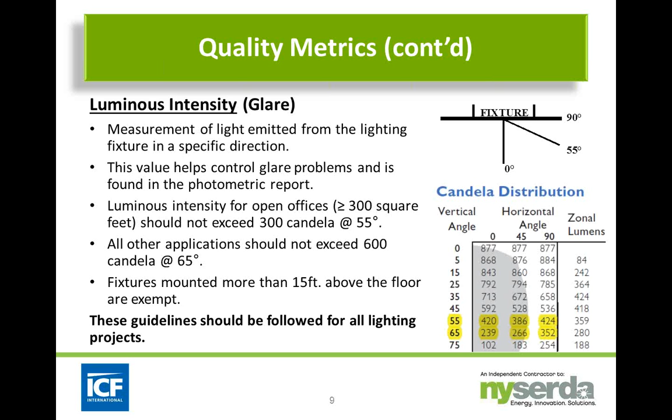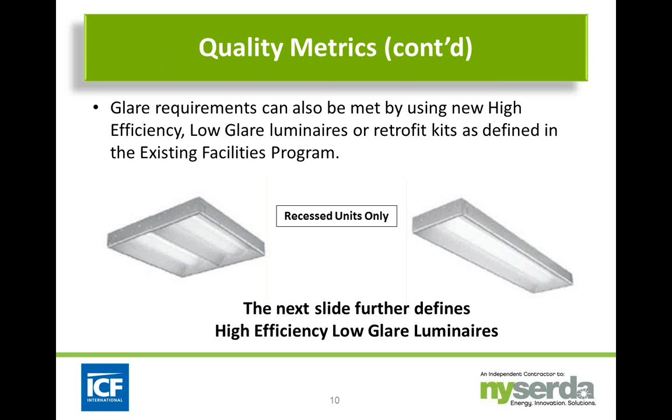Continuing with glare control, there's another option: you can use what we call a high-efficiency, low-glare luminaire or a retrofit kit, as defined in the existing facilities program. Some of you might recognize this type of luminaire—it's been around. We're now starting to see more solid-state lighting or LED luminaires with these characteristics, and we're trying to evaluate them now.

To qualify as a high-efficiency, low-glare luminaire, the overall fixture efficiency must exceed 80%, and it must distribute light at very high angles. At least 15% of the light output, or zonal lumens, must be between 60 and 90 degrees. 0 degrees is looking straight down through the luminaire, and 90 degrees is looking straight out parallel to the floor from the luminaire.

1 unit equals 1 fixture with 1 or 2 lamps. This is one of the qualifications for a high-efficiency, low-glare luminaire with a single ballast.

It must also incorporate advanced lighting distribution and glare control. This is not a common basket fixture you might be familiar with, which used to have perforated louvers or perforated reflectors with a mylar backing. The efficiencies on those old basket fixtures were actually quite poor—somewhere in the 50s and 60s percent was the amount of light getting out of the fixture. So high-efficiency, low-glare luminaires are much more efficient and do a much better job.

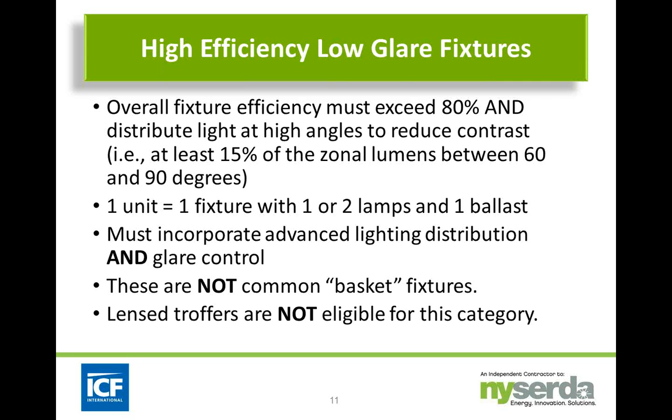This is also not your typical lens troffer. You don't want to use an A12 prismatic lens luminaire for this type of application.

The next quality metric is horizontal mean illuminance—basically the light level, the foot candles, the average light level in the space. We're not asking for a maximum or minimum, just the average. We've taken the recommendations from the Illuminating Engineering Society handbook and incorporated them into the program.

You can find the information for different categories because not every space is the same. This is on the metrics by space page, which is included in the application packet. We're actually going to look at portions of the metrics by space page in a few minutes.

To get to the average horizontal mean illuminance, you need things like initial lamp lumens, fixture efficiency, and ballast factor, but those are not the complete story. You need to determine the light losses, the maintained lumens—that's what you're looking for in horizontal mean illuminance.

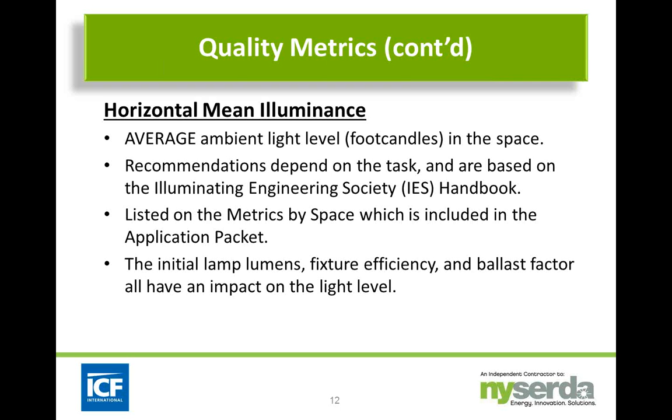Some minimum target light levels you might run into are, say, 10 foot-candles for a corridor or hospital. I won't go through every line, but one item we like to focus on is 50 foot-candles for a high school gym. Depending on the type of gymnasium, it may require a different light level, so you need to be aware of that issue.

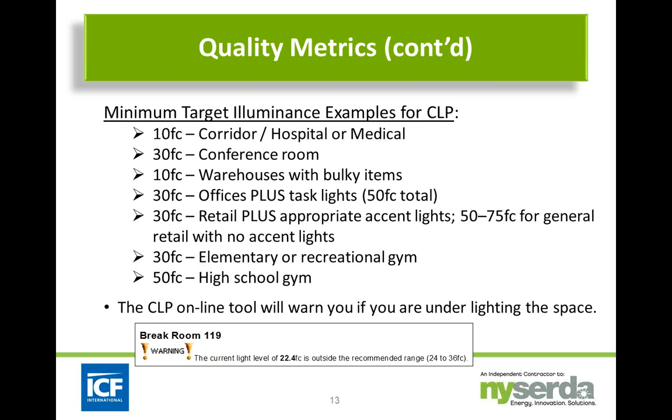When you enter things in the online application tool, you can use it as a design tool because it will give you back calculated light levels. If the light levels for a particular space are lower than they should be, you'll get a warning message, like here, saying the current light level is 22.4 foot-candles, outside the recommended range of 24 to 36 foot-candles.

Another quality metric is illuminance uniformity, basically the maximum to minimum light levels on the work plane. You want to minimize as much as possible the high and low spots in that space, so there aren't very dark areas in between the luminaires.

How do we do this? We look at the spacing criteria. The fixtures must be laid out within the spacing criteria listed on the manufacturer's luminaire photometric report or specification sheets. They're different if it's anything other than a round fixture—different along and across. Along is usually with the length of the lamps, and across cuts through the length of the lamps, so you have two different dimensions.

Even some newer round fixtures with LED sources have along and across spacing criteria that vary, so be careful of that. This spacing criteria for illuminance uniformity does not apply to accent fixtures—if you have a decorative fixture, a track head, or a wall wash fixture, it doesn't apply for this program.

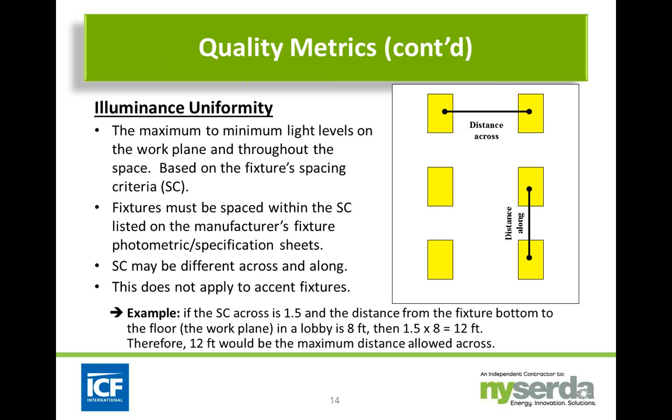Now, how does this work? If the spacing criteria is 1.5 across the luminaire, and the distance from the fixture bottom to the floor or work plane is 8 feet, then 1.5 times 8 feet is 12 feet. So the center of the first fixture to the center of the next fixture cannot exceed 12 feet across.

We also want you to consider vertical illuminance as part of the quality metrics. Horizontal illuminance, or illuminance uniformity, is based on the light output between the fixtures and the spacing criteria between the fixtures, but we want to be concerned about the fixture distance to the wall.

I've seen projects over the years where somebody said, okay, I've got a 30-foot wide room, and I'm going to put 2 rows of fixtures in there, coming in off the wall 10 feet to the first fixture, then 10 feet to the next fixture, then 10 feet to the wall. Sounds logical, you're splitting up that 30 feet 3 ways between all those fixtures. But in most cases, that actually does not provide you proper illumination at the walls.

You really can only use half the distance of the normal spacing between fixtures when you're spacing to the wall. So if you're allowed 12 feet between the fixtures, center to center, you're only allowed 6 feet to the wall. This will provide you relatively uniform vertical illuminance.

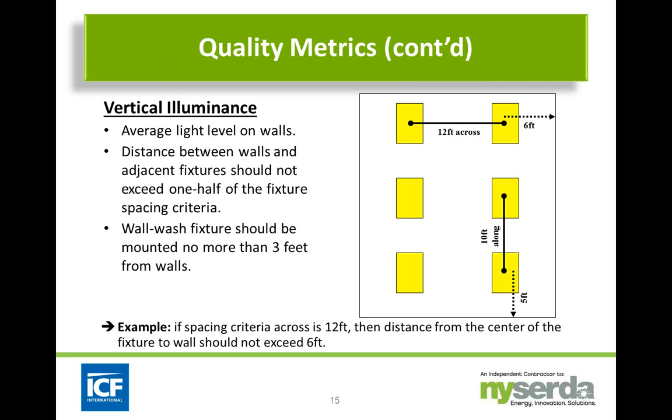We should let you know that we do provide a 20%, or 2-foot, allowance on that. We understand that the geometry of the rooms and the geometry of 2x4 ceilings or various different ceiling treatments may not allow you to work exactly within that spacing criteria, so we do allow about a 2-foot allowance.

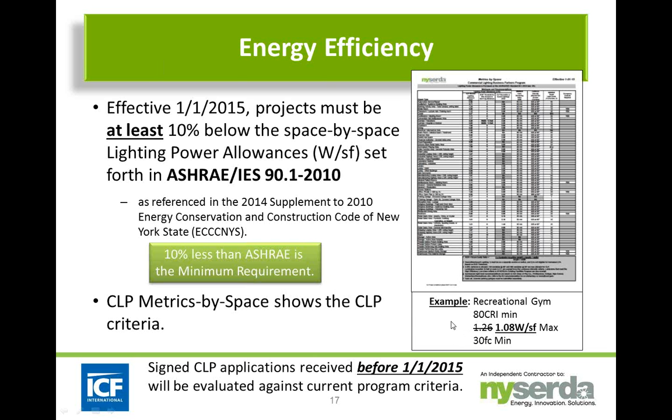As we mentioned, we're currently following, and will be following, ASHRAE 90.1 2010, at least 10% below that. But in addition to changing some of the watts per square foot numbers for energy use, it also made some different modifications, so you don't have to be quite as concerned about the numbers dropping too low.

There are considerations for spaces that have odd dimensions and a high room cavity ratio. We'll discuss exactly how you calculate room cavity ratio in a second, but essentially these are spaces with very long or very tall dimensions, and they get an additional 20% of lighting power allowance for a high RCR. Certain types of spaces will also allow for additional lighting power allowance for decorative or accent lighting.

This is a totally separate number from the main general lighting power allowance, and we'll get into some of those numbers in a minute. We have the metrics by space page, where you can look up the lighting power allowance for each space type, for general illumination, for accent lighting, and we'll also show you the RCR allowances based on high RCR numbers.

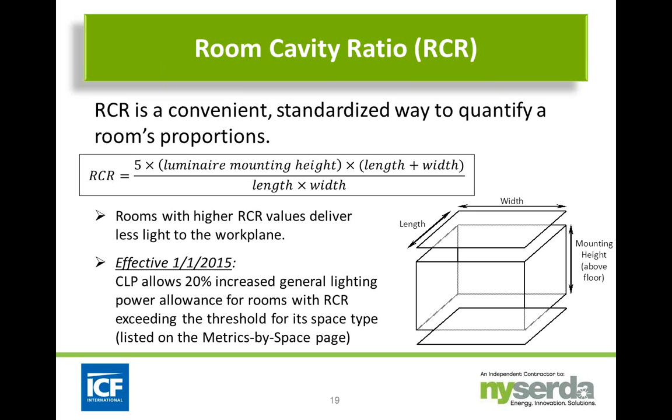And divide that all by the area of the room, or the length times the width. So if the room has a higher RCR than the limit we're working with from ASHRAE, then it's allowed an additional 20% for general illumination for that particular space.

For example, if you have a private office that's 12 foot 6 by 10 foot by 9 feet high, when you run through the calculation, it will have an RCR of 8.1. The room cavity ratio threshold for private offices under ASHRAE is 8. Since 8.1 exceeds 8, the standard lighting power allowance of 1 watt per square foot is increased by 20%.

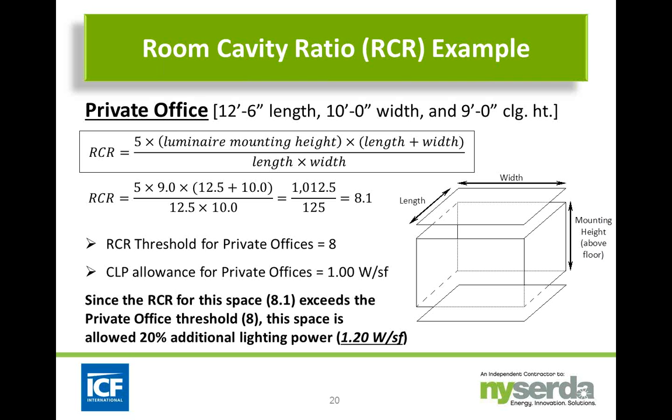You get an additional lighting power allowance of 20%. So instead of 1 watt per square foot for that private office, you have 1.2 watts per square foot. It's harder to light those high ratio spaces with the same lighting you would use for a standard type space. That's the reason for having the additional lighting power allowance.

How does this all come together? If you're dealing with different spaces and different sizes, and have watts per square foot allowances for the different categories, it all comes together by looking at the different categories and collectively adding them together.

So we're not only allowing an additional watts per square foot for high RCR spaces, but we're also allowing you to meet the watts per square foot for the entire project rather than just for a specific space.

So let's say your open office actually has 1,100 watts for some reason. As long as your total watts in the entire space or the entire project do not exceed 6,492 watts for this example, then you can still qualify for that project.

Restrooms are a tough one - a lot of times it's hard to meet the 0.88 watts per square foot required. So these are areas we can look at collectively, and you can aggregate the total watts for the entire project.

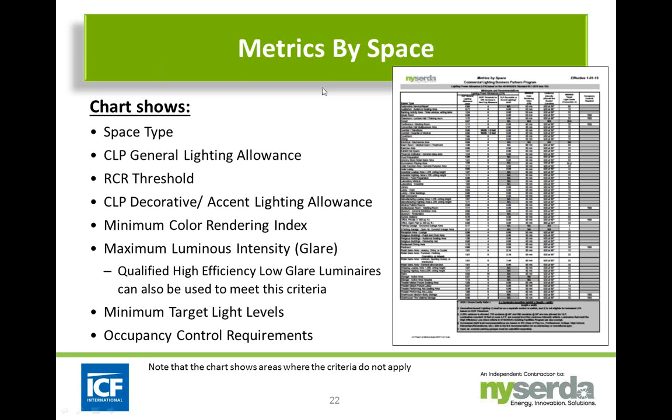And so the metrics by space page pulls all these details together. What the chart shows is the space type, the commercial lighting program general allowance, the RCR threshold, the decorative allowance, the color rendering index that's required, the light levels and glare control, and what occupancy sensors are required, or which types of spaces they're required for.

For auto repair service specifically, there isn't an additional allowance for accent or decorative lighting. But there are other spaces, like banking activity areas, where you have accent lighting allowance, decorative spaces, etc.

The bottom table here, which is on the metrics by space, also reminds you of some of these other rules, like the 20% variant that you get for the additional RCR, the gymnasium light level that you want to look at the IES requirements or recommendations for the different types of gymnasium spaces, whether it's an NCAA type of space, whether it's just a recreational gym at the YMCA or your local exercise facility, or whether it's a high school gym. They all have different lighting allowances or light level requirements.

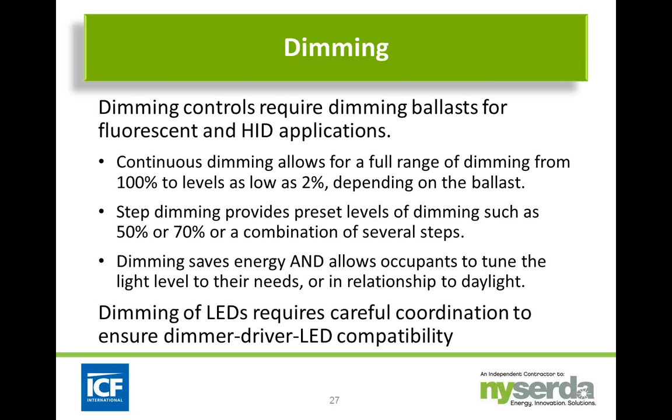We do actually have an advanced controls presentation that some of you may have attended in the past that gets into the deep details of daylighting and daylighting controls, and we can talk to you about those if you're interested.

So you might also, on controls, see complete energy management systems or subsystems for lighting. And they can actually integrate the time of day settings with the vacancy sensors and other features of the dimming systems. One example might be to have various different presets for cleaning crews. So if a cleaning crew is coming in at 8 o'clock at night and the office has basically been shut down since 6 o'clock, then the lights can be controlled for that short period of time while the cleaning crew is in the space.

Today, we're seeing a lot more with wireless technologies for controls so that you can actually, without having to rewire a luminaire, add a module and be able to control that from some kind of a wall switch that has a wireless receiver and transmitter. The initial cost might be a little bit higher, but the overall installation cost of adding wireless technology to a particular space may be much less expensive than trying to rewire. And now there's also self-commissioning units that allow you to do daylight sensing by just going in, setting it all up, and it will actually self-commission itself over time.

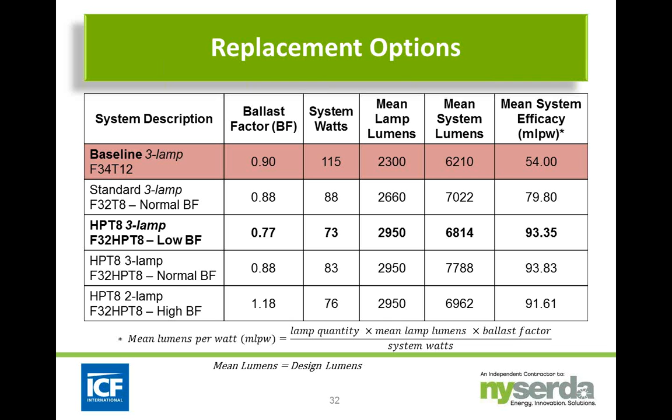You have different categories. You can change to a standard lamp with a normal ballast factor F32T8. You can go to a high-performance T8 low ballast factor, and that's the application that we're actually going to focus in on here, where you can go to a 3-lamp 0.77 ballast factor, which is a 73-watt system, and gives you about 6,800 lumens out of that entire system, which is considerably higher than the 6,200 lumens from the F34T12, and the lumens per watt of the high-performance T8 low ballast factor luminaire is about 93 lumens per watt. And this is a really good example of how you can make a change out this way.

So if you looked at an existing 3,000 square foot retail space and the owner was looking for a 75 foot-candle light level, they're probably only in the 60s currently. They wanted to know what their options were. So if the existing system's F34T12s, it's about 115 watts per luminaire, and they did have 60 foot-candles there.

Today, we believe that there's applications where we can go also to LED, but at this point, we're looking for the cost effectiveness of that particular application, and we're looking for information from people to help us. The cost of the fixtures at this point hasn't allowed it to get down into these kind of cost savings.

And so you can actually evaluate this information through a life cycle cost tool that we have available to our business partners, where you can input the kilowatt hour rate. You need to look at somebody's utility bill. Kilowatt hour rates vary. If you were in upstate New York last year, it went up to 20, 25 cents in the middle of February and March, and then it went back down to 14 cents. So it varies. You want to make sure you're looking at what that is.

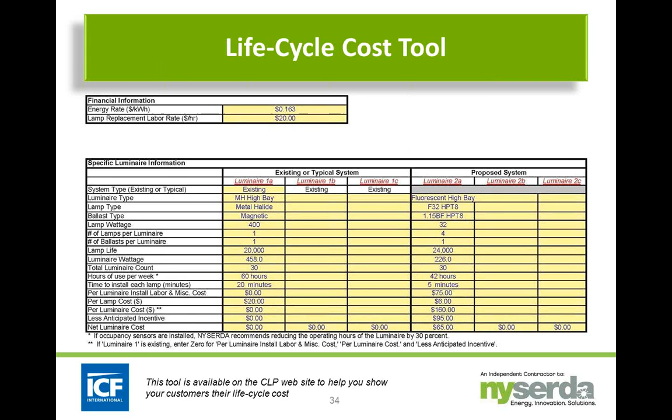But you can compare 3 existing or typical systems in this life cycle cost tool to 3 proposed systems, and you can provide this tool an output of actual energy savings, payback period to your customer. It'll show you things like the simple payback period, which in this case is 1.08 years, and annual return on investment of about 93%. It'll also show you the KW reduction and the greenhouse gas emissions reduction.

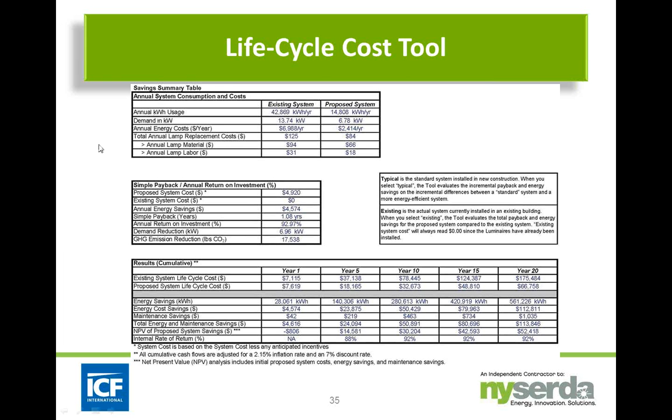And it also shows you not just the simple payback period, but it shows you the life cycle costs over a 1 to 20-year period. And this is a nice tool to be able to use for your customers to demonstrate how they'll not only be saving energy, but they'll be saving money over time.

And how we calculate that is we have to capture things like the initial fixture cost, the lamp replacement cost, which also includes the lamp life and also the ballast life, the energy cost, how much is it going to cost per kilowatt hour, and put that all together, and we come up with the energy savings through the life cycle cost tool.

So at this point, I'd just like to poll the audience to get an idea of whether or not you have or use a life cycle cost tool. And so we've set up the poll here. Do you currently use a life cycle cost tool in your project information to your customer? And so everybody's voting quickly here. We're up around 60%.

Give it a few more seconds. 71% vote. Anybody else? Okay, the voting slowed down a little bit. So we'll give everybody a few seconds here.

Okay, so this poll comes out that 48% of you are currently using some form of a life cycle cost tool, and 44% of you are not using a life cycle cost tool. I would suggest that if you're not using some kind of a life cycle cost tool, whether it's ours or whether it's a manufacturer's or something you develop on your own, that this would actually help you to close the sale more effectively, because it actually shows you various different features of how this is going to save energy and money over time. And here's an example.

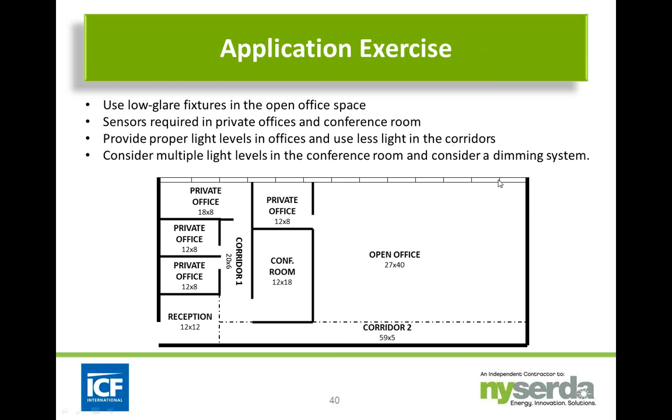So LED seems to be the biggest buzzword these days. As of January 1st, 2011, NYSERDA started allowing various different types of LED products on their existing facilities and new construction programs, and they did create a solid-state lighting policy. And basically what that policy says is that if you're using some form of an LED luminaire, it's either got to be on the Energy Star or Design Lights Consortium qualified products list.